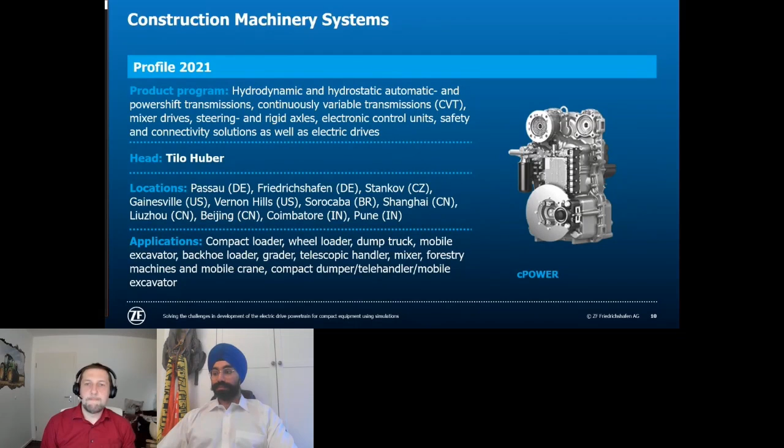The typical product can be seen on this slide. Here we see the fully automated power shift transmission, which is somehow a standard product for many construction machines, especially wheel loaders, across a wide range of operation weight. It's somehow the basic technology that we offer. Here on the right-hand side, you can see C-Power. This is somehow the technological lead before electrification—a continuously variable transmission with mechanic hydrostatic power split.

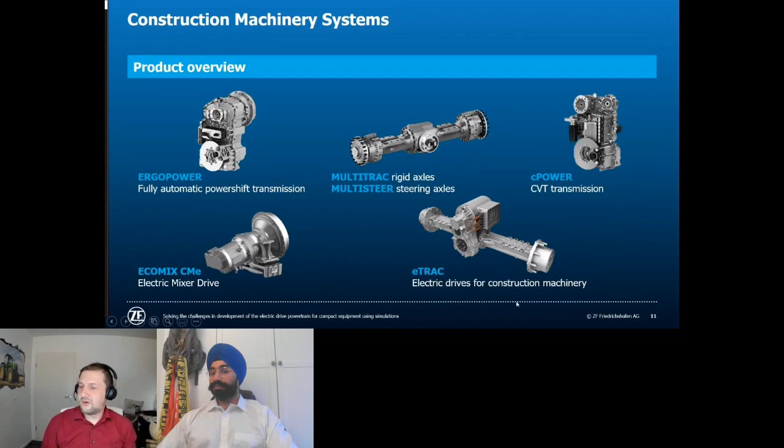The overview would not be complete without mentioning where the electrification of drivetrains had its beginning. In material handling, we have been offering electric drives and components for many years. ZF is a full-liner in material handling technology. We have drives for lifting carts operated manually, up to equipment for use in automated warehouses, for example. We have electric drives in our portfolio, electric steering systems, control units, transmissions, axles, as well as safety and connectivity solutions.

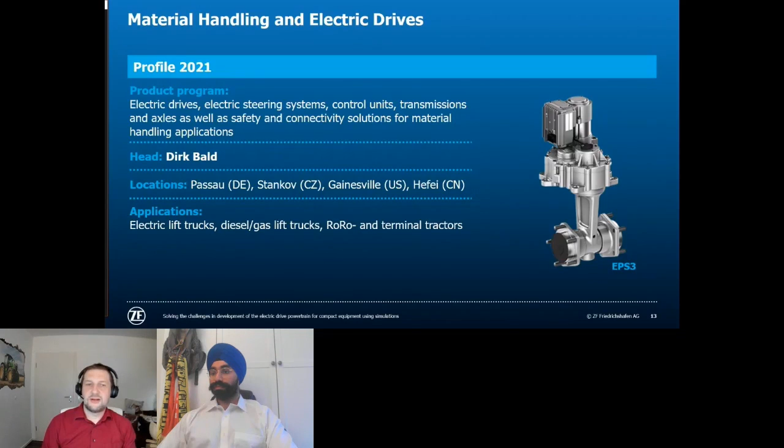This example shows a steering system for a front-wheel driven, three-wheel counterbalance lift truck. Here you can have a look at some parts of the material handling portfolio.

Material handling is the point where the partnering of the ZF Group and ZAPI had its origin. We are electrifying the mobility market together in this market segment for many years. We have a cooperation in development of the product, and ZAPI is the system supplier of this product.

I think this was a short and quick overview. And now let's dive deeper into our main topic, the development of the 48-volt central drive system.

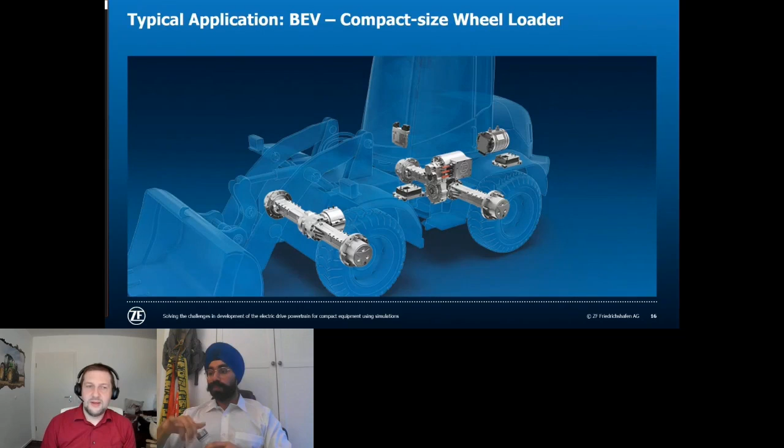But it also has a really huge mechanical kinematic to operate the implement, the big shovel. This is operated by a hydraulic cylinder that also has to be operated simultaneously with the drive by a skilled operator. So if you see this product, you see it's a really complex machine.

And for this reason, it was decided to use a systems engineering method to carry out the development tasks.

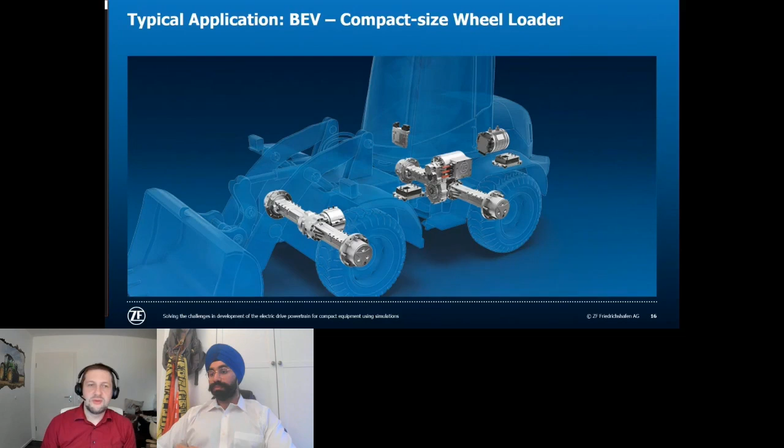We analyzed the starting situation. The main tasks, you can also call it the enterprise strategy for ZF in the construction machinery market, was electrification of a compact size wheel loader. Then, as important as this specific application, is building up a platform strategy for electrification of other construction machines up to 80 kilowatts power in the first step and beyond in the second step.

We analyzed the business needs for the project and got additional project targets. It's necessary to be first to market, or among first to market, because the electrified construction machinery market is developing really fast and growing. So we want to be part of this and be leading with technology. As the second point, staying among technological leadership, we had this position with the power split transmission, also with the CVT transmission, and we want to keep it. So we have a first-time-right approach for the electrification.

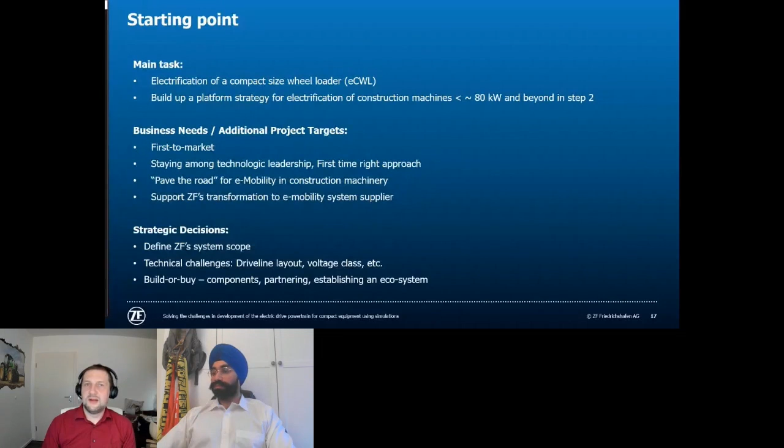And of course, it's challenging to decide whether to build or buy the parts, where to spend the invest, where are the components that are differentiating, where is it best to get a good partner to have the best solution at the end. And it's somehow establishing an ecosystem for developing electrified construction machinery.

For that reason, we did some context analysis of the system context of a battery electric compact wheel loader. If this picture looks familiar to you, it's a screenshot from a system model in the modeling tool Cameo. We did an analysis of the subsystems that this wheel loader consists of. Let's go through them quickly.

There is, of course, a need for a battery system, for a power supply for the battery electric wheel loader. Then we need a cooling and heating system—cooling and heating of the driver's cabin, also for the battery system and for the motors, e-drive motor and power take-off motor, and also for the inverters.

Then we need 12 and/or 24 volt power supply for the parts that are used from conventional machines, such as the HMI parts or, for example, lighting of such a vehicle. Then, as you have seen in the picture of the wheel loader, the hydraulic system is a really big part of such a wheel loader.

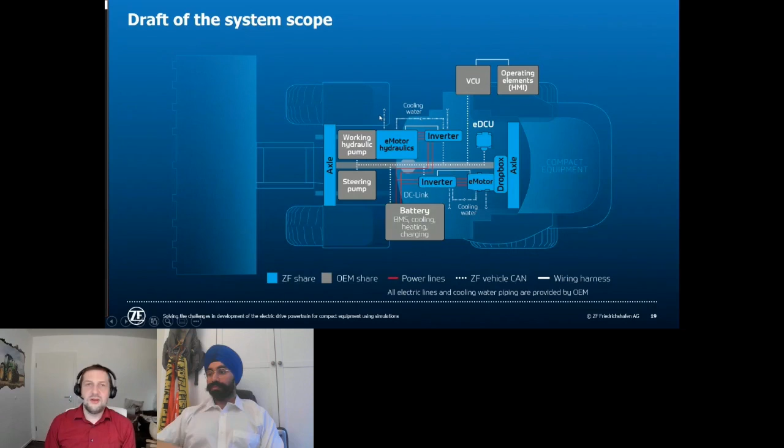And there are the components working hydraulic pump and steering pump, where we also said this is excluded from our scope. The reason for this is that we see the OEMs want to produce battery electric vehicles and diesel-powered vehicles in parallel. So it's better not to have much variance in their products, in the components that can be the same in both variants.

We come to this in the next slide, where we show what requirements we got from the stakeholder analysis that we did for designing the product. We, of course, used ZF's experience in developing construction machinery. We know the use cases. We have measurements of duty cycles, of course, for the well-known Y-cycle truck loading. My colleague Rajvinder will show this a bit deeper in his part. Then stockpile and transportation cycles are also known use cases for construction machines.

Then we did, of course, a market research and got the information and requirements that driving performance of a battery electric construction machine has at least to be at the same level as a conventional machine with a combustion engine. There are no lower expectations because a machine is electrified. That is not tolerable because those are working machines and they have to fulfill their duty.

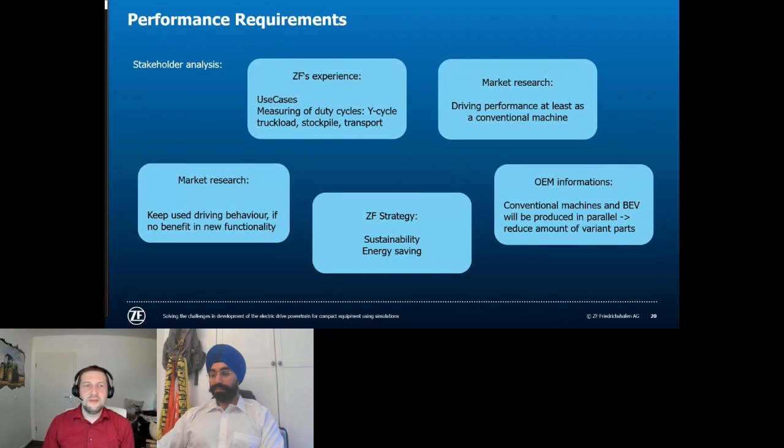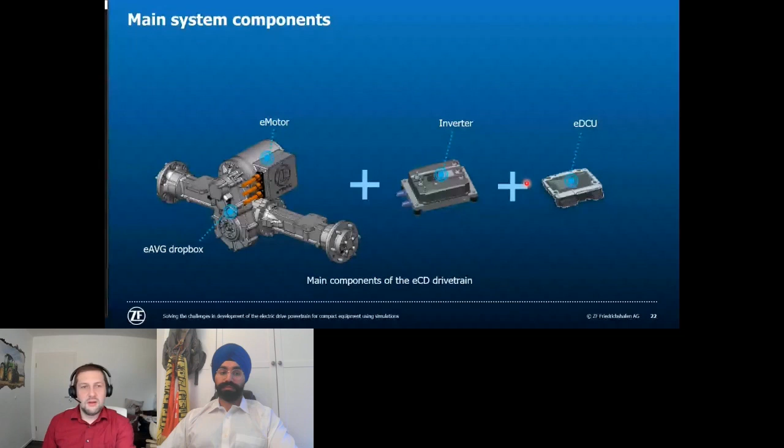So let's go one step deeper with the electric drive system. Here you can see that our transmission, this one-stage drive, is designed in one size that fits for all electric central drives, for all the e-motors, beginning from 20 kilowatt continuous power up to 80 kilowatt maximum power that we have designed for use in the compact construction equipment.

The same electric motor can be scaled in the nominal voltage in the range from 48 volt up to 650 volt. This can be done by adjusting the windings inside the motor, and also adjusting the stacks of metal sheet that are inside there, but without changing the diameter of the electric motor.

So this drive system fits to the machine platforms that the OEMs, that our customers have now, and they can change easily up to the electrified versions. The electric motor only changes in the length, and this is the less critical dimension where we can have installation space for the system.

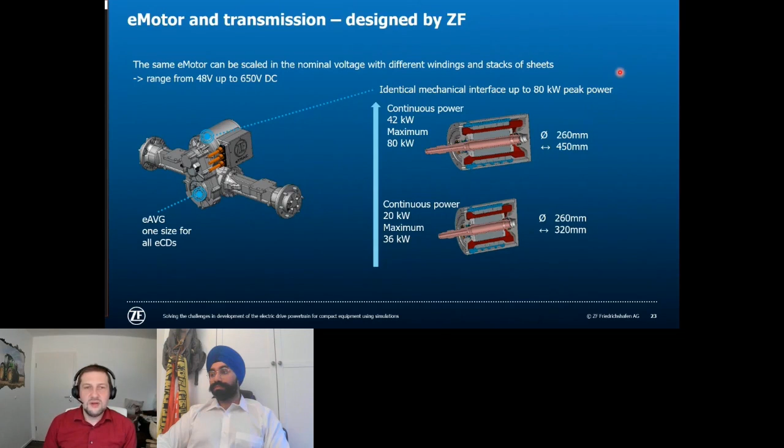And one additional advantage of this product is the change of operation mode. The same inverter can be used for powering the EPTO drive and also the drive motor. Both motors can be connected each to the same inverter.

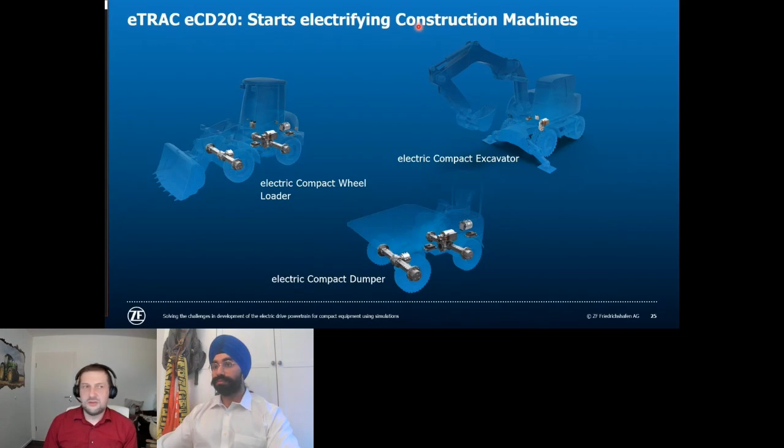With this overview, I want to end my presentation, and Rajvinder can take over. Yep.

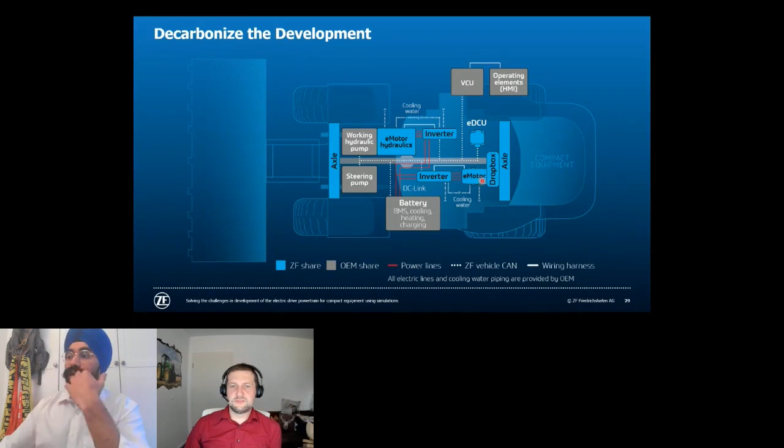As Werner explained, following the power lines, the battery is connected to the inverter for the electric motor that operates the power takeoff, or PTO. At the same time, there are battery lines that connect to the inverter, which is then connected to the traction motor. The traction motor is connected to the drop box, which is then connected to the axle, which drives the wheels.

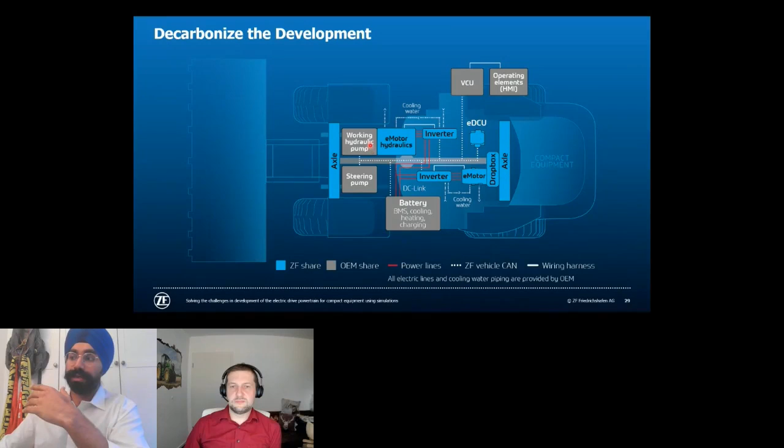The EDCU, or electric drive control unit, is responsible not only for the traction system—that is, the inverter, e-motor, drop box, axle system—but at the same time it also takes care of the electric motor hydraulics.

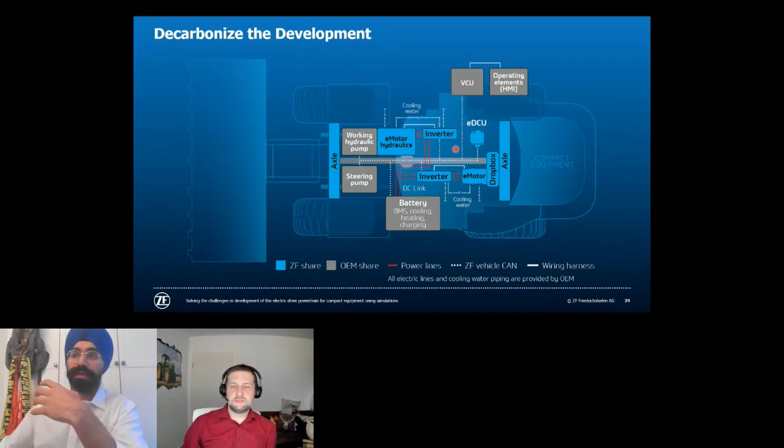The systems not directly addressed by ZF, such as the battery system, the VCU, and other auxiliary systems, although not directly addressed by ZF, we at ZF think in integrated development. So for us it is important to have a larger system overview than to just focus on our part and get done with it. That is why we focus on systems rather than subsystems or simply components.

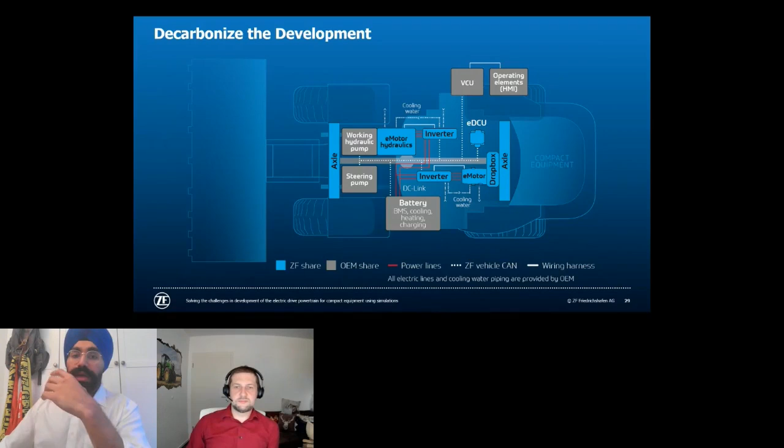Summarizing the challenges that Werner explained in his part of the presentation, we have these four main challenges in our crosshairs. We need the same performance, at least as conventional wheel loaders or conventional drives. We need to make sure that the architecture or the entire system we are developing is scalable, so it could be adapted to different voltage sizes, different motor sizes, and different gear ratios.

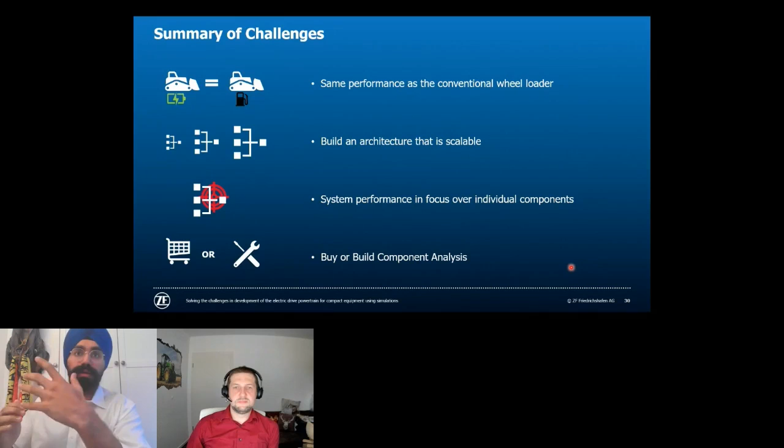In addition, as I said, it is important for us to have an optimized system and not just focus on the components. That means we would not like to be penny wise and pound foolish, but would like to focus on the entire system.

And finally, the buy or build component analysis. That is, does it make sense for the components that are already available—for example, the systems that SAPI Group provides—to see how those systems suit best with our system, and how we can use that so we can reach the market as soon as possible.

In addition, we also need to understand that when we talk about the same performance as conventional drives, it is not just about power, torque, or the load the vehicle can take. It is also about considering the work duration that a conventional vehicle offers. That means that if the conventional vehicle's work hours were 8 hours with a 16-hour rest between two shifts, the electric drive needs to provide this particular performance as well.

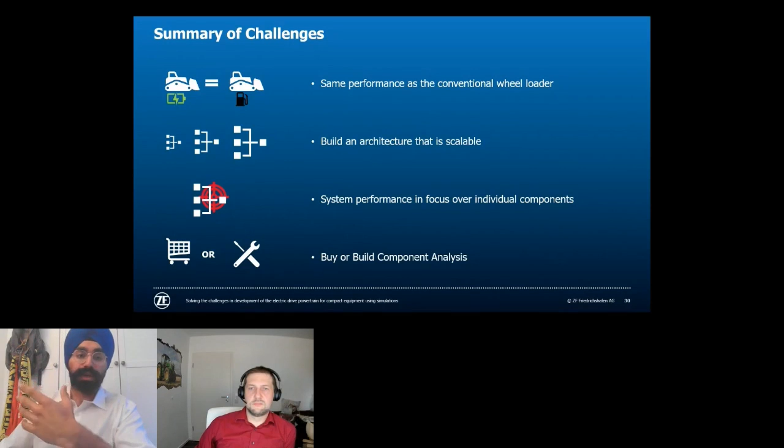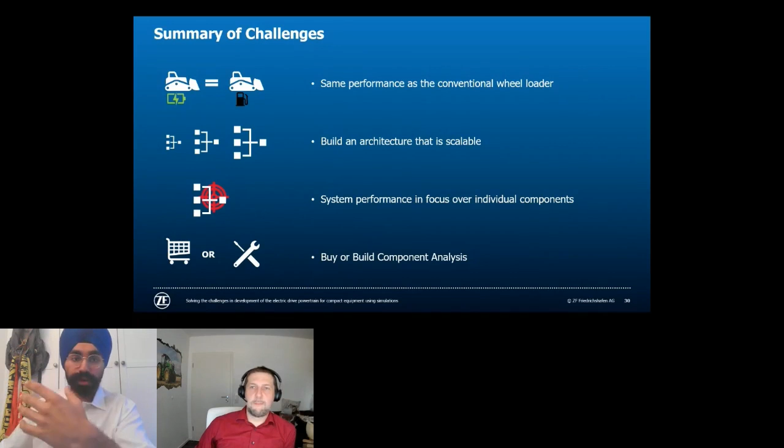Additionally, when we talk about these challenges, as Werner mentioned, it is important to make sure we do it quickly and accurately the first time. Now, we did this accurately, we did it quickly, but there are always lessons to be learned.

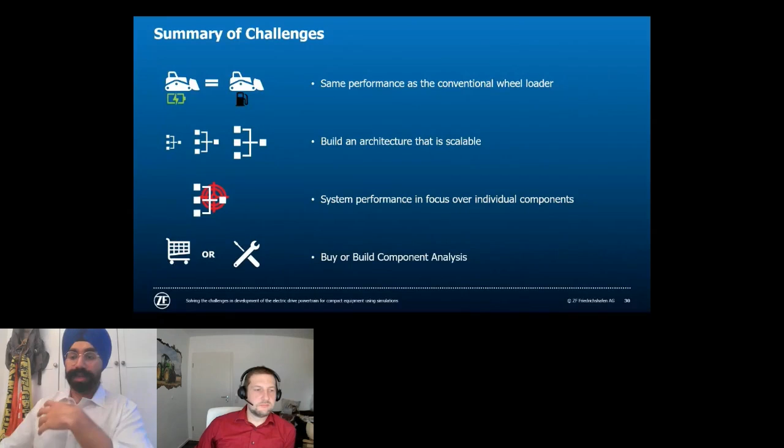This entire simulation process, which I am about to explain, has been divided into three parts. The first part focuses only on the past, or what we did. Then we talk about the present, what we are doing and what we learned from the past, and how this would not only support these compact equipments but also take forward the entire industry, improving all other sectors that ZF works in. And also the future, where we think about the direction needed to reach this sustainable, reduced energy or zero emission target.

So let's jump into the past approach. This is a very rough and small summarization of what we did in the past. There are basically three parts that we focused on. The first is the definition—just thinking about what our target is. Now, the target is, as I explained, these challenges.

Let us take one target, for example, the same performance as the conventional drive, or maybe focusing on scalability, something like that. So that is the first part of the approach that we used - properly, concretely defining what we wanted to achieve.

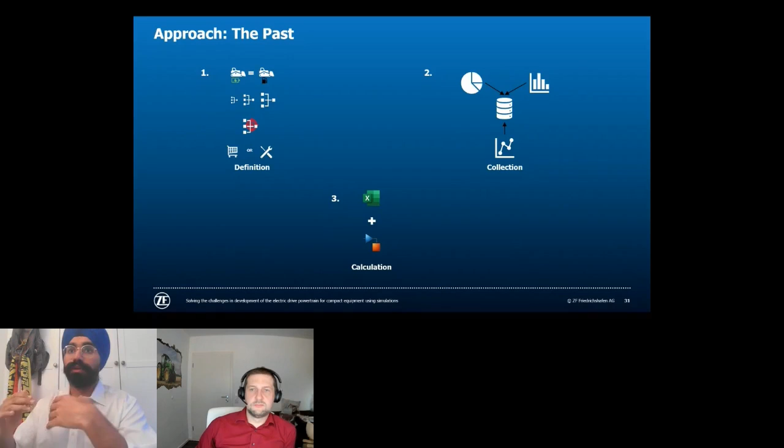The second step in this approach was the collection. The SAPI group, during the initial development phase and throughout thereafter, helped us with developing our system so we don't have to reinvent the wheel. That was really helpful, like using inverters from InMotion, and we got the data from them. They were constantly in exchange with us, and we were able to send our results, take their knowledge, and integrate the system as quickly as possible.

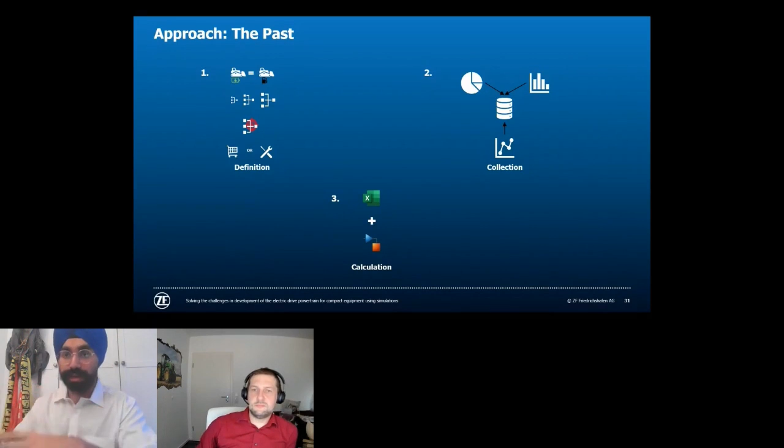Following the collection phase, wherein we use our past learnings and collect current data, while also collecting data from our partners, we get into the final phase, the calculation phase, where we think about how we can simulate it, if not extremely sophisticated, but at the same time reach a very accurate and plausible result. So that was the third part.

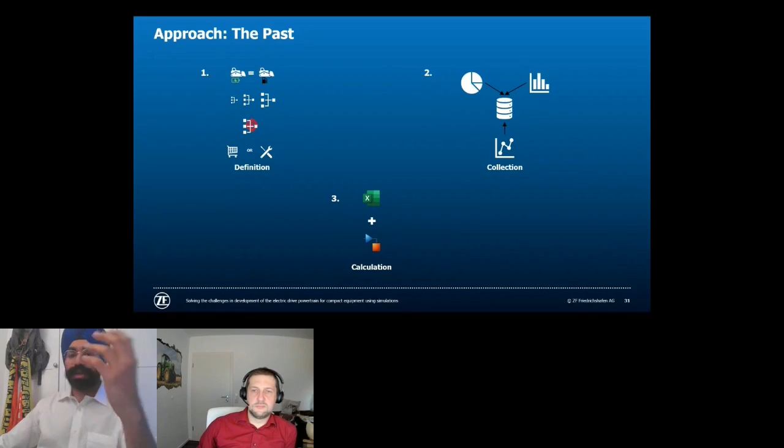These three steps, I'll explain using three or four basic examples - so how we went about it.

The first part is the thermal behavior, or when we were thinking about the thermal performance of a motor. This is basically a plot of the temperature profile across the length of the motor, with temperature on the y-axis. The target was to understand what temperature is reached at each cross section of the motor.

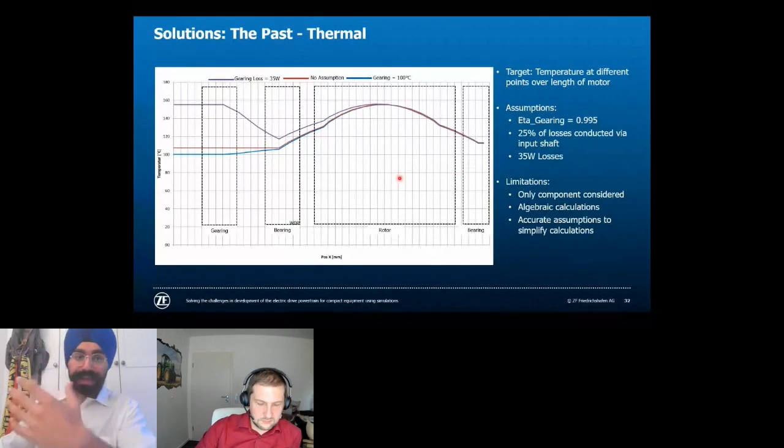The catch here was that since we are developing this equipment for the first time, in an initial development phase, you need to reach certain assumptions and take educated guesses so that you reach your result with the greatest amount of accuracy, while also making sure those results are verifiable.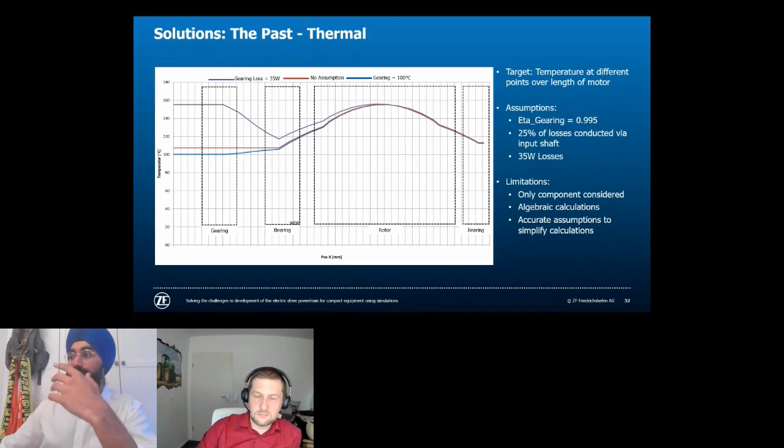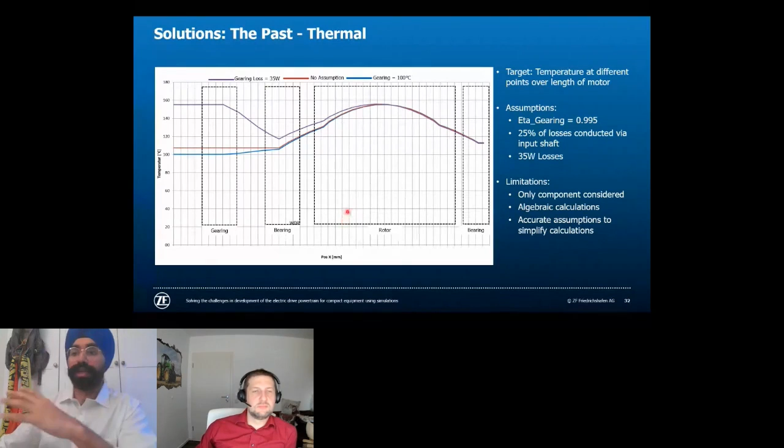As a result, we took some assumptions here, as you can see, regarding the efficiency and the percentage of losses that can be conducted over the input shaft, overall loss, etc. The limitation here was that during that time we were focused more on optimizing the component and had more of a component purview rather than going directly or jumping into the system purview.

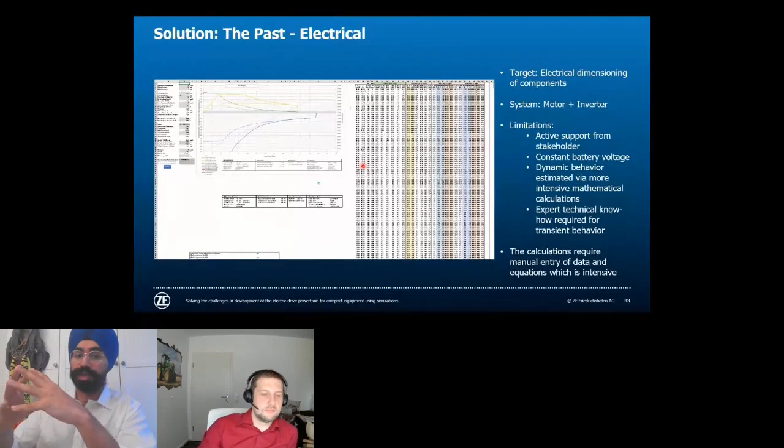Following this, if you look at the electrical analysis, we had more idea of the entire system - we had the system in our crosshairs, and we used this electrical analysis to decide the electrical dimensioning of different components. These simulations were basically made for different load cycles.

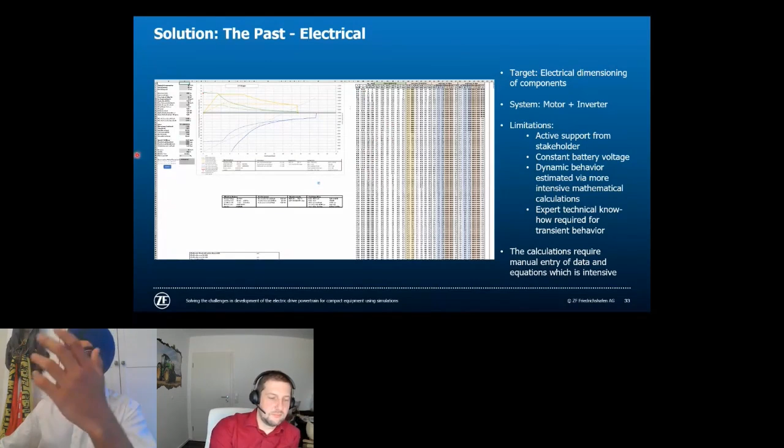As Werner might have shown, this diagram might be familiar from Werner's slides, for different load cycles across time. At the same time, we looked at what sizing of each component we need.

Additionally, if you look at the peak torque of the motor we were using, we wanted to understand if it can suffice our needs, so we took the motor and inverter into consideration - basically focusing on the immediate subsystem.

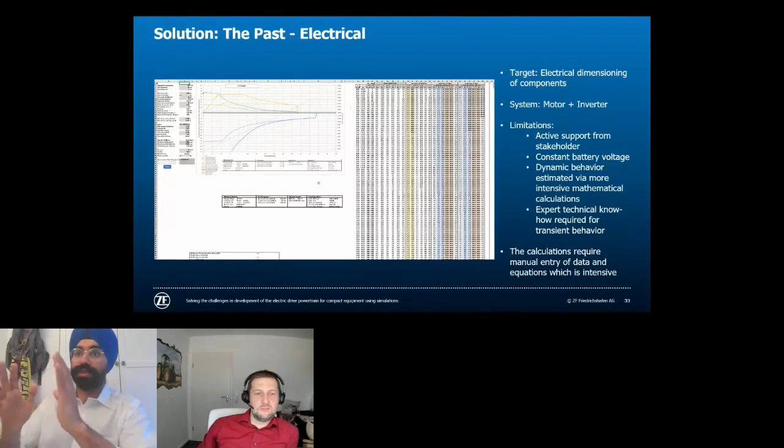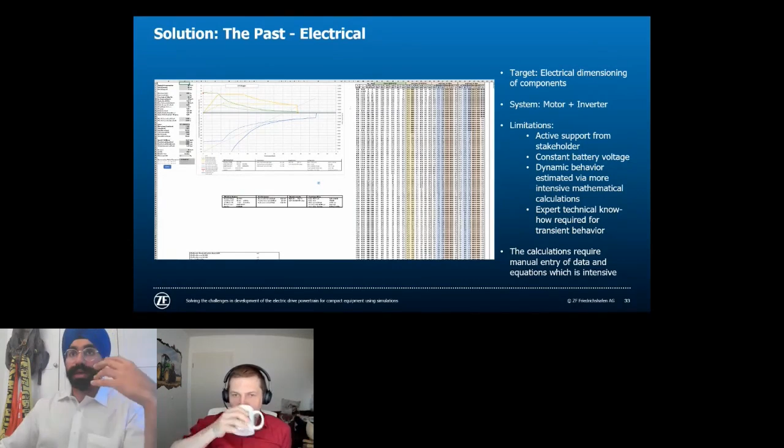Following this, the point I want to drive here, particularly with this calculation or this part of the simulation, is that focusing on subsystems and developing these concepts helped us realize what we actually need to focus on in the coming future and how we reach our target quicker. Although focusing on individual components and individual subsystems does lead to accurate results, it is more labor intensive.

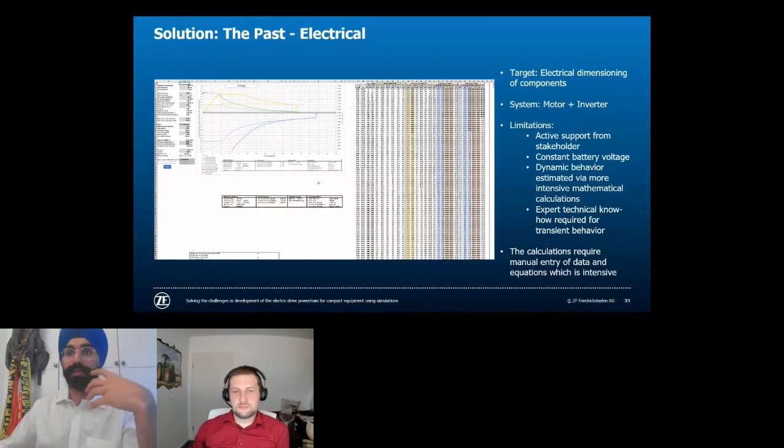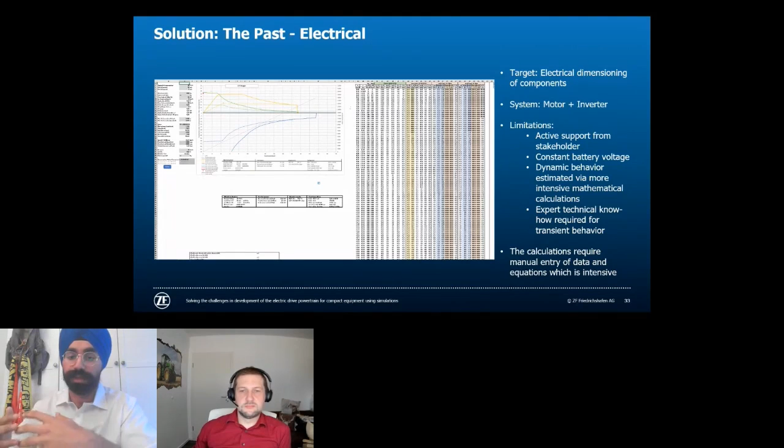It requires experts to be actively participating in the entire development process, and that basically slows down the entire development process as a whole. So our target is, like I said, to reach the market first, reach it accurately, and make sure that the product is perfect, but make sure that it comes in quick as well.

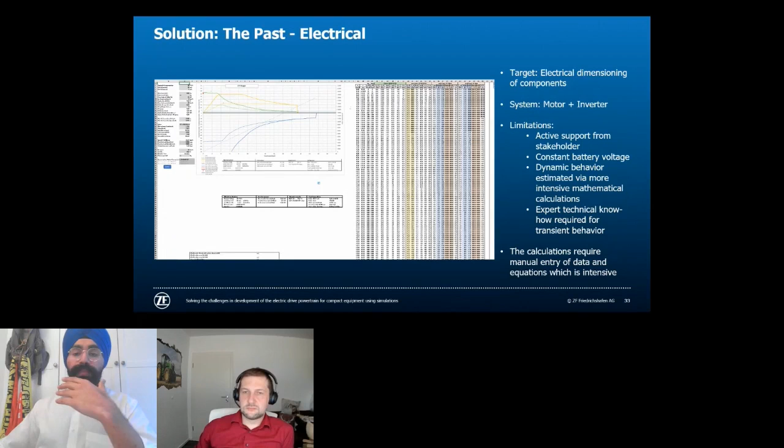Following the lessons that we learned from the past, we come to the present. In the past, as you could remember, we had three parts: one was definition, the other was collection, and the third was calculation. From that past, we learned that is not all that we can do. We need to do something more, and we need to reach a more comprehensive approach to solve our challenges.

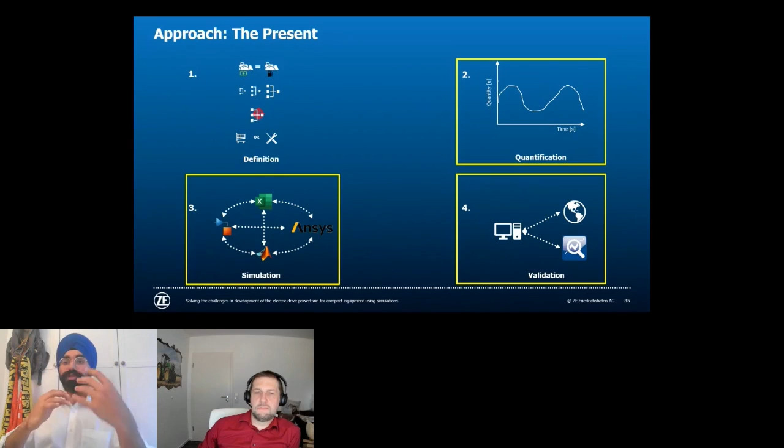So we came up with this 4-prong approach, or a 4-step approach, wherein we have the definition as always, wherein we define our target, following which we go into the quantification phase. That is, we focus on the system, try to quantify the targets in a power versus time, or a speed versus time, or a torque versus time profile over the lifespan or over a specific time duration of the vehicle.

So not just focusing on one component and how it would perform for a certain instant or operating point, but focusing on how the entire system or the entire vehicle would perform over a span of, let us say, a truckload cycle, the video of which I showed in the second or third slide. Or a stockpile cycle or a transport cycle, or what would happen when I keep running those cycles one after another, or a mixture of them, over a span of 5 years, 6 years.

What would be the performance of the vehicle? That was important for us to take into consideration, to extrapolate our vision and push the vehicle. What would happen if we push the vehicle to its breaking limits? So that comes in the quantification phase.

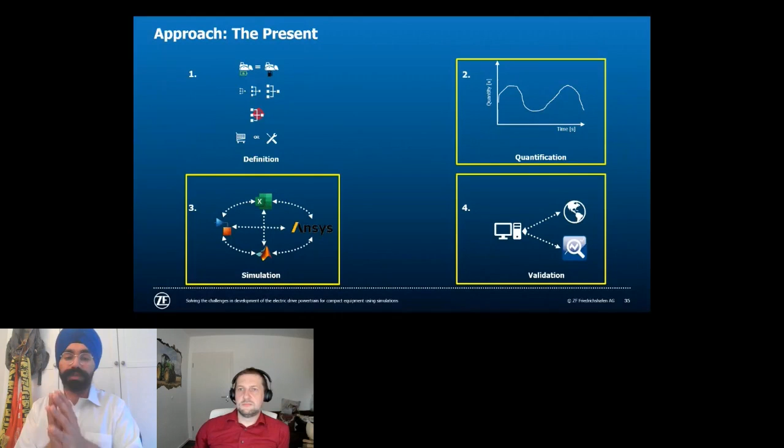The data, the calculations, or the understandings that we gather in the quantification phase, we use this data to run our simulations.

The simulations, as compared to what we did in the past, are more integrated. They are more top down, rather than just going from down to top. That is, we not only focus on individual components, but on the entire system, and we don't stick ourselves to just one software, but take a mixture of software, look at the interaction between all of them, and use that entire knowledge to try to optimize the entire system. So that is the target of the simulations.

And finally, following the simulations, we get into the validation. The validation here, for those of you aware of how things work, is not the same validation as what you might find in a traditional technical approach. In this, this validation is basically to optimize the simulation.

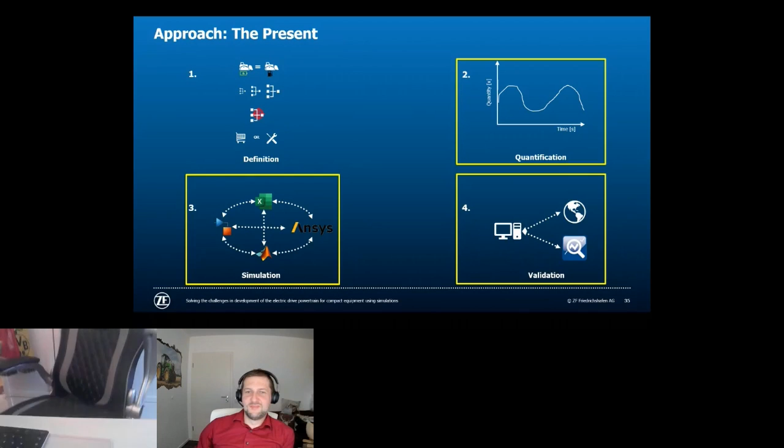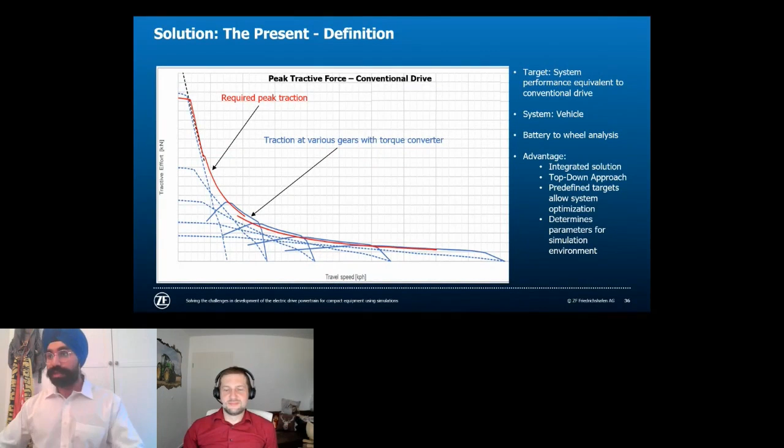Okay, so now getting on to the first part, that is the definition. So the definition, as you can see in this slide, our target was to reach the same performance as the conventional drive.

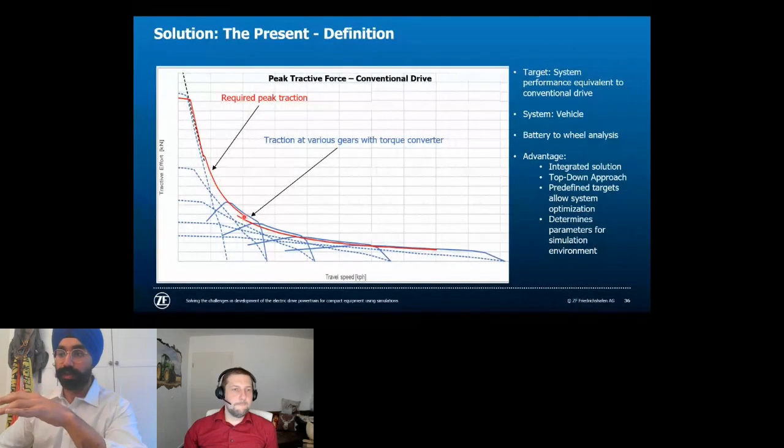So we have this conventional drive profile that we had from the initial drivetrains, or the initial equipment, that we had provided. You look at the peak performance or the peak traction that is required. What I would like to emphasize here is that the peak traction or peak performance of the vehicle is in focus, not just the motor or a particular subsystem.

Additionally, if you look at it, you see the performance or behavior over various gears with the conventional drive that we had used. So the advantage of this system is that we are focusing on a battery-to-wheel analysis, not just certain subsystems. We are focusing on an integrated solution, and the target of the entire approach is to optimize the system rather than just certain subsystems or components.

Once we use this in the definition phase, once we take the performance of the conventional vehicle and overlay the motor profiles, we see a region of overlap between the peak profile of the motor and the continuous profile of the motor. This overlap region basically helps us understand when to go into the shifting phase, that is, when a gear shift should happen.

Conversely, if I were to decide the point of gear shift, or the vehicle speed at which I would like to shift gears, I can see which motor profile would fit this particular range the best. This is the approach you take, and these are the knowledges you gain in the definition phase, which are then used further on in the quantification phase.

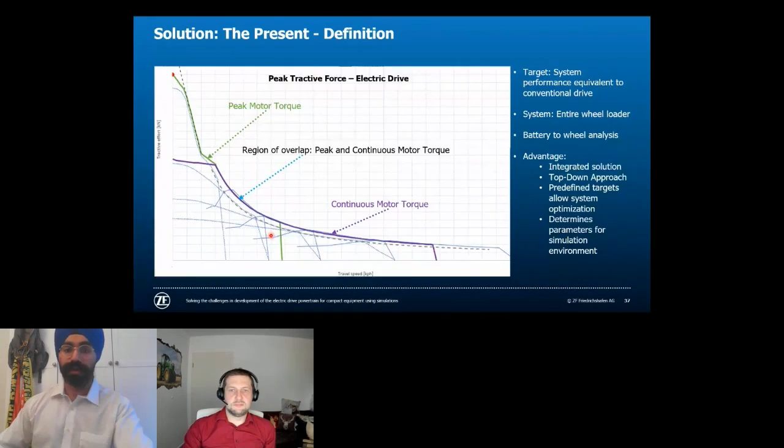As I explained, quantification is collecting data from the short Y cycle, or basically the performance or behavior of the vehicle in any of the cycles, the data which InMotion kindly provided us of their systems, then the knowledge that we had, the knowledge that was largely available.

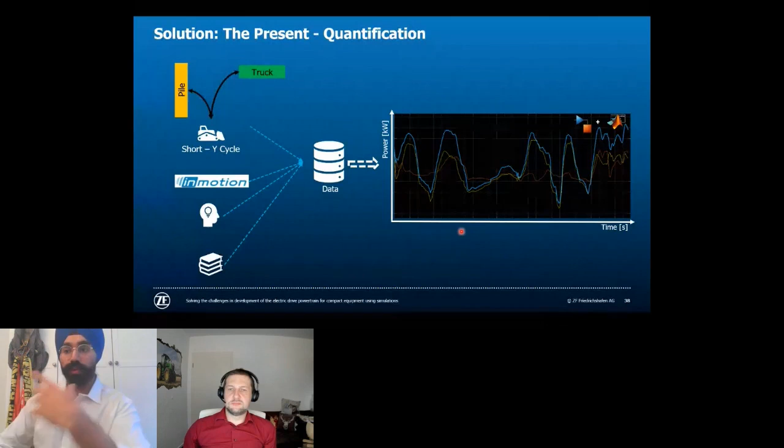You collect that data and use it to build a power or any sort of profile against time, which can be reiterated over and over again, and fed into a simulation environment. The advantage of doing this is the possibility to push your system to the limit, which in reality might not have been possible. If you were to focus just on a part of the system, it would result in a successful system on the component level, but might result in failures on the system level.

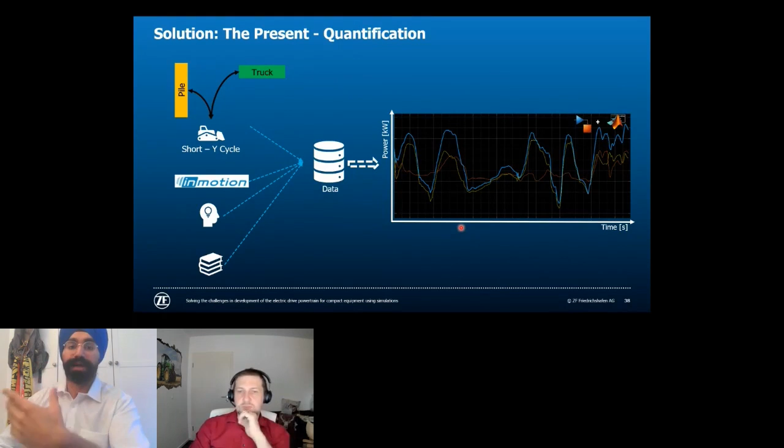So we are done with part one, the definition and the quantification. Now we go on to the main crux, that is the simulation. This is the main crux of the entire presentation, or my part of the presentation.

You have the system requirements decided during the definition phase, and additionally the data you collect during the quantification phase. These system requirements and performance requirements are gathered using Cameo, like what Werner showed, and additionally Code Beamer to manage requirements, and Excel, because it's apparently one of the most powerful tools. So you manage these system requirements.

You take these system requirements and work them out into a systematic power profile or any sort of profile over time, as I explained in the quantification phase. You feed those power profiles into a driver model. The entire simulation environment is built using multiple software, that is MATLAB Simulink, Dymola, and also integrates many FMUs, hence it has to be FMI adherent. These performance or power profiles are fed into a driver.

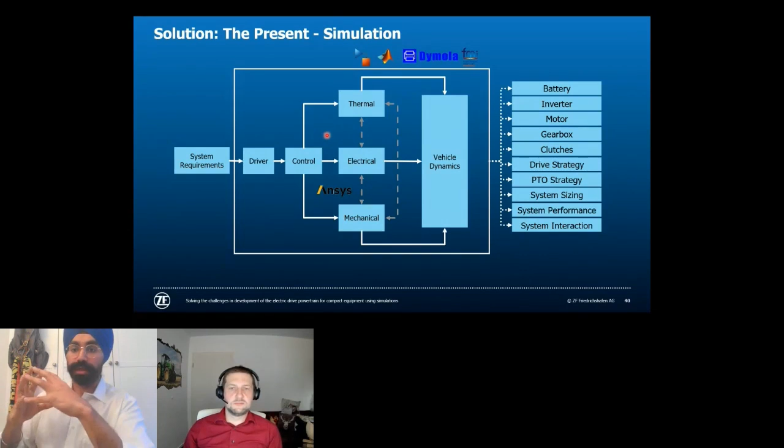The controller is not only giving commands to the thermal system - the thermal, electrical, and mechanical systems communicate with each other as well. The point I'm driving at is that, again, we have the system in our main crosshairs rather than just one single component. So when we talk about the thermal system, it's basically the entire thermal system of the motor as well as the gearbox and the battery. If we talk about the electrical system, that's the battery, the inverter, and the motor.

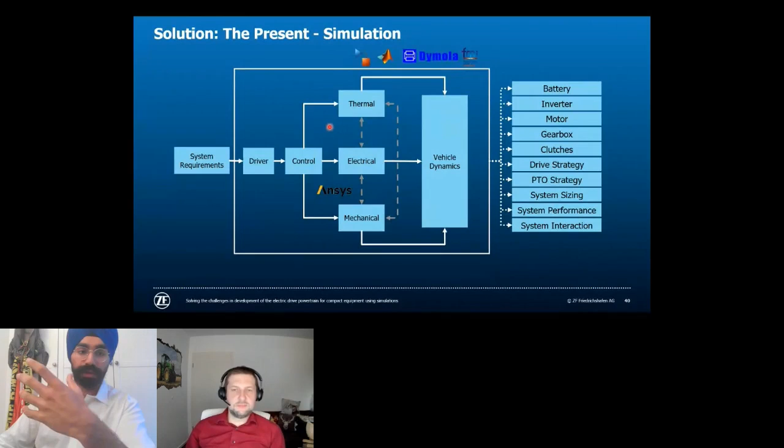The data for these models is obviously obtained from other stakeholders who provide these systems, and also from the OEM, depending on their share of the product, or their share of the project.

Additionally, if you look at the mechanical part of it, it basically tells you how the vehicle would perform as a whole. What we use is ANSYS software or individual component simulations to populate the parameter files for these three systems: mechanical, electrical, and thermal.

The advantage of doing that is you have a very accurate system already modeled inside your simulation environment, but it gives you the freedom of not having to use complicated or transient simulations all the time to parameterize your environment. Instead you can use a quasi-static simulation approach to simulate the entire vehicle, which is quicker.

Following the three systems, you enter into the vehicle dynamics. From the vehicle dynamics, you have an output or system analysis interface, wherein the analysis of the battery, the inverter, the motor, gearbox, and also the system sizing and performance can all be done, looking at this simulation interface that I've shown.

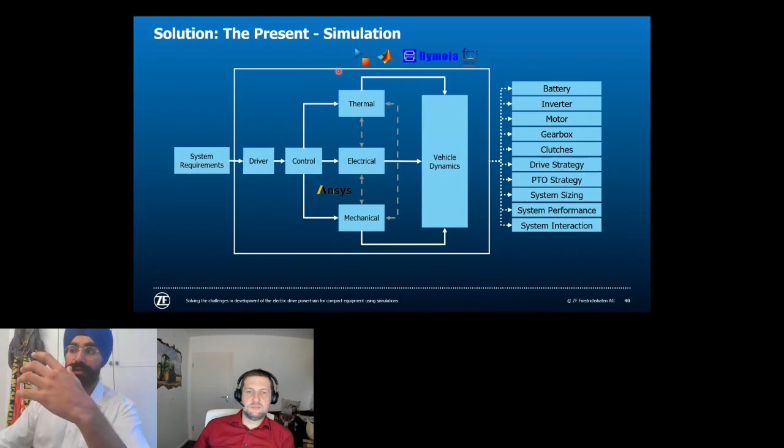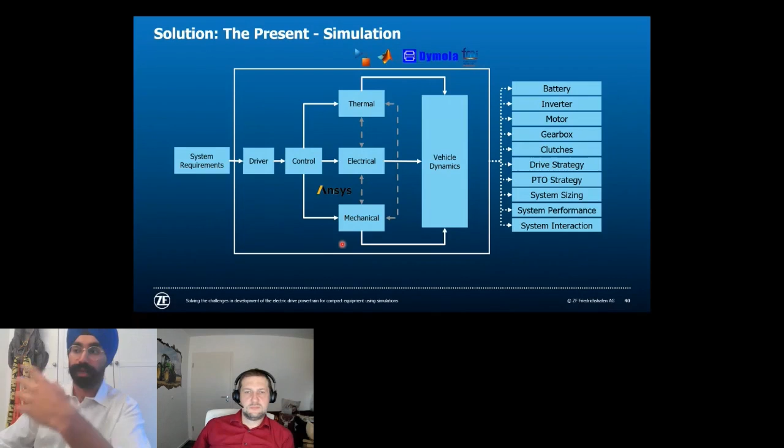I can take care of scalability, or basically buy-or-build analysis, by populating these three systems, wherein I populate the component files from the data I get from the stakeholders and also from the data we decide to enter into these subsystems. I have system performance in my crosshairs, and at the same time I can manage these system requirements as I please.

Additionally, if I talk about scalability, this particular simulation interface is infinitely scalable. I can scale it to any other platform, and I can use this particular approach for simulating any other vehicle as well.

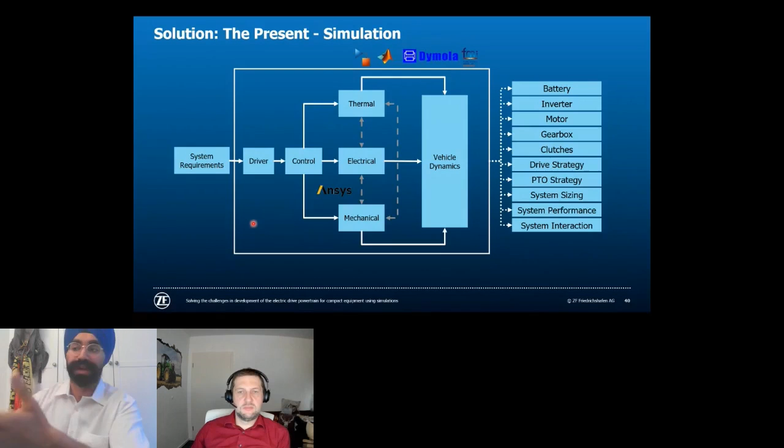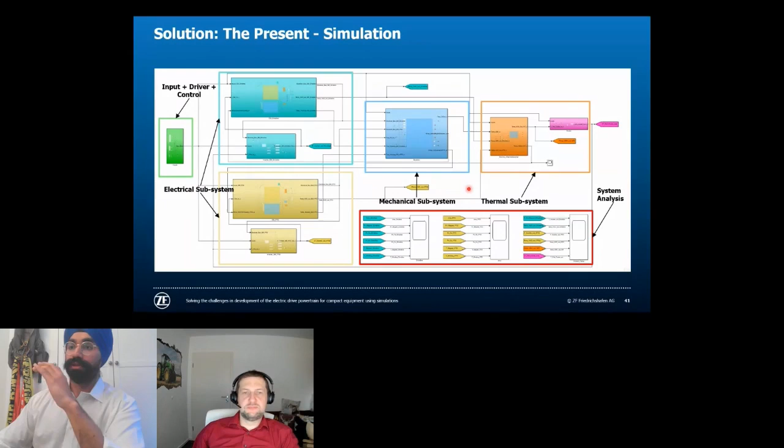You might notice I haven't shown over here the vehicle subsystem, because that's something OEMs generally like to keep under wraps, and as a result we are not privy to show that right now. But overall, from our side we show an additional vehicle subsystem, which accesses all this information and then provides the basic system performance data we need to reach a very educated decision.

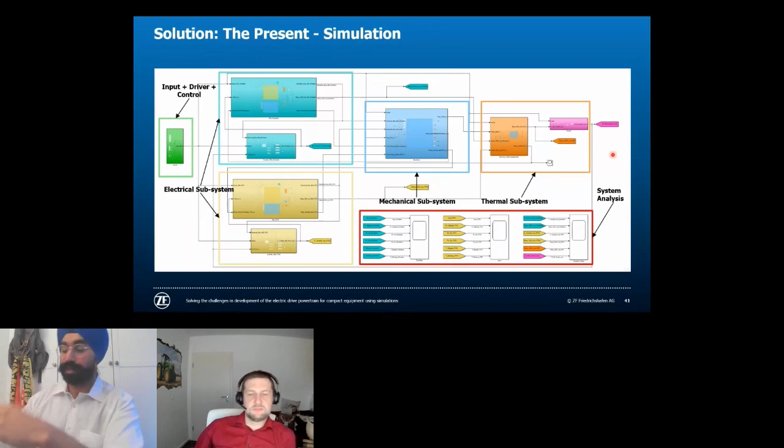Looking at certain results generated via this simulation, one of the challenges we had while designing the system is the cold start performance and its remediation. So what we thought about is simulating the entire system at 0 degrees Celsius, looking at electrical losses we have at 0 degrees Celsius.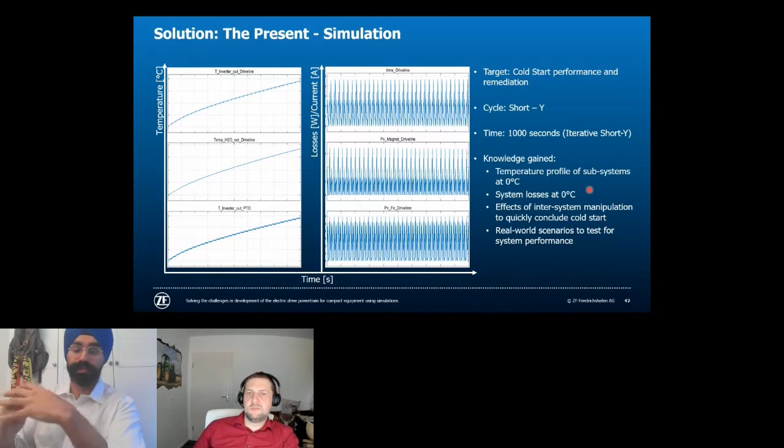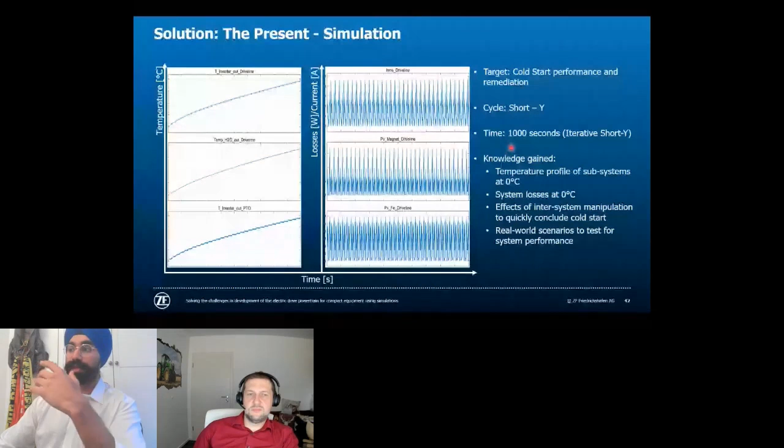The idea was to simulate real world scenarios as closely as possible, and at the same time try to find a method or trick, so to speak, so we can end this cold start phase as quickly as possible, bringing the entire system temperature to its desired temperature as fast as possible. In doing so, we run iteratively a short drive cycle for, let's say, 1,000 seconds as an example. The advantage of these simulations is that you can not only look at the derating strategy if we are critically pushing our system at 0 degrees Celsius, for example.

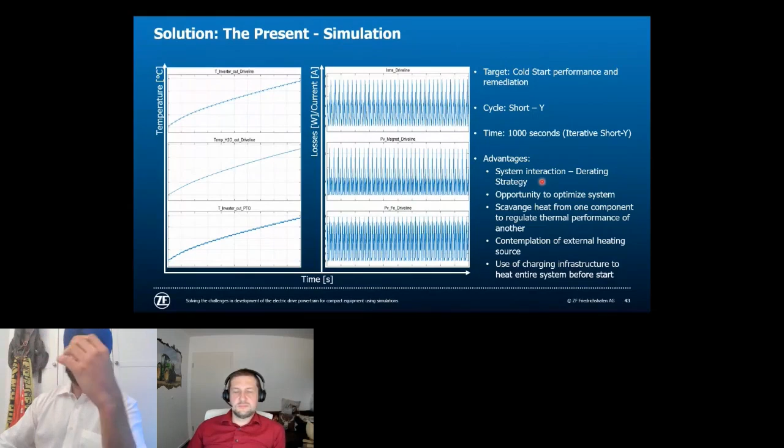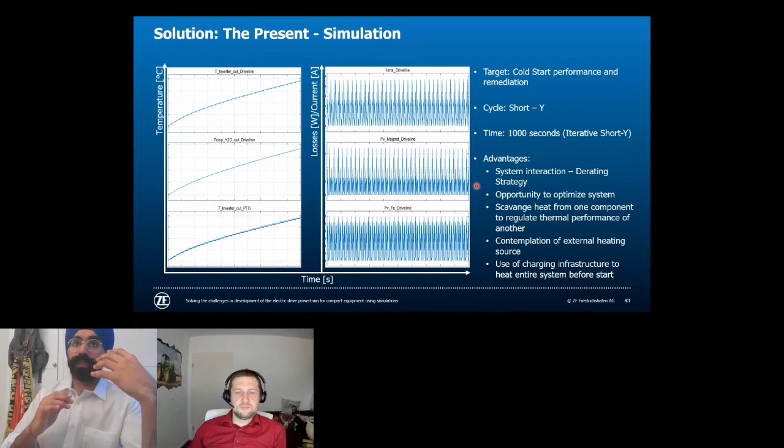We have the opportunity to optimize the entire system, because we not only have the currents and the losses in the motor, but also we focus on the temperatures at various points, for example, in the inverter or in the driveline. Additionally, we have the opportunity of scavenging heat from one part of the component and passing it to another part, so that we could use the heat generated in one part to heat up the other part, so it can reach its optimal working temperature.

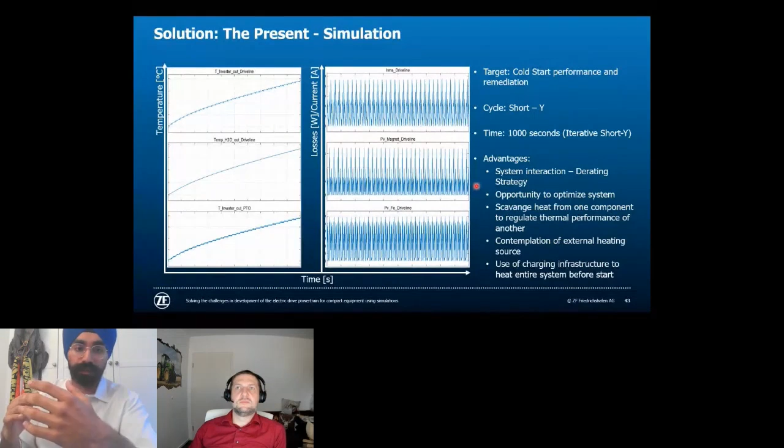Additionally, it gives us the idea of testing if using the charging phase, which happens at night, we can bring the entire system to a certain temperature before starting work. That is also an additional advantage we had while simulating these results.

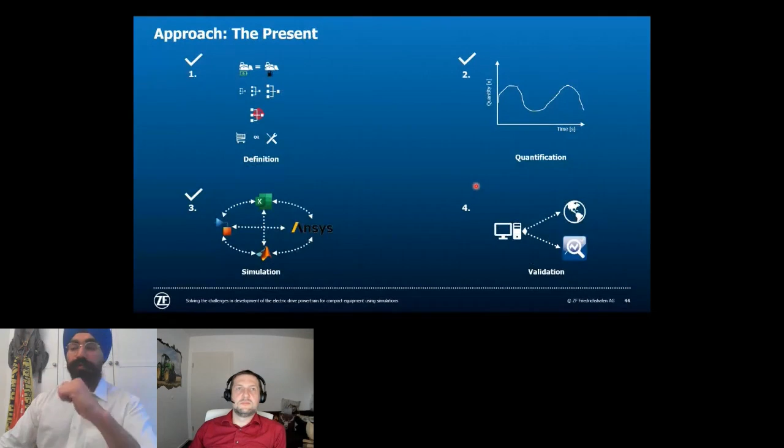So coming back to this overall overview, we are finished with the definition, the quantification, and the simulation as I've shown. Now let's get on to the validation.

Thinking about validation yet again, the idea is not to jump from simulation into manufacturing and then try to validate your product or see if it performs as you want. The idea of validation is basically, in the simulation environment, to use the outcome or results of the simulation and try to mimic them on the test bench or in the field.

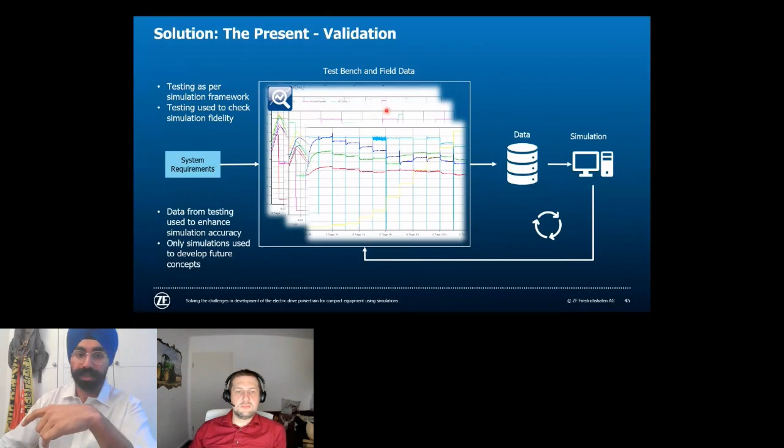The deviations that you have from this particular testing, you feed those deviations back into the simulation area and try to simulate them again. That is, you try to couple the simulation and the testing in such a way that at the end of the day, it can improve my simulation interface as a whole.

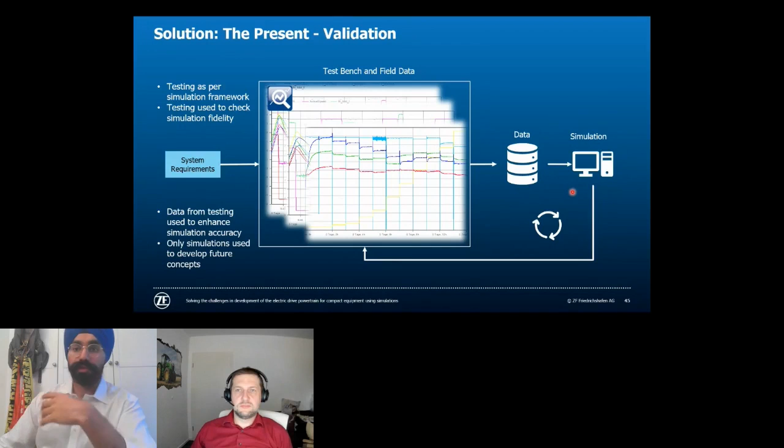The purpose of being so simulation-focused, or the idea that we at ZF have of trying to improve our simulations to such a larger extent, is something I would explain towards the end of the presentation. But it is always, in our opinion, easier to simulate something and check beforehand if there are any issues, than to manufacture it and end up wasting your resources.

So the present is complete. That is, we are finished with the definition, quantification, simulation, and validation.

Going over to the simulation ecosystem, let me just summarize it. How does it look? It is the start, then we get into definition, quantification, simulation, validation. The validation and simulation is iterative, and then you reach the target.

The data set, or the data required for each of these stages, is pretty self-explanatory. You need requirements, the data from stakeholders in the definition phase. In the quantification phase, you need data sets for the model, the power profiles, the dimensions, and the characteristic or performance maps.

In the simulation phase, you need to make sure that you choose the right software and standardize the code, as well as the interface.

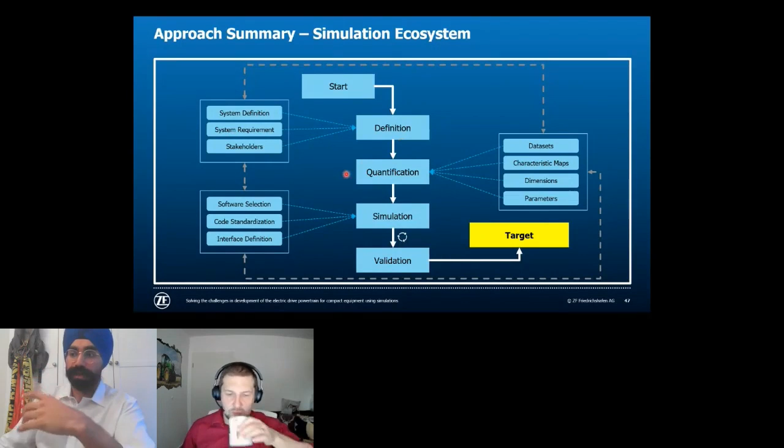But what we additionally need to focus on is that there has to be a unanimous or unified approach when choosing this data for each step and feeding that data. That is, the code should be standardized, meaning it should always have a standard nomenclature, a standard methodology of coding, and a standard interface that is reproducible, adaptable, and scalable.

When we talk about system definition and requirement, we need to make sure that the code developed is always in congruence with the system definition and requirement. At the same time, the data set and the characteristics map we have should be in congruence with the system requirement, and at the same time, with the coding and simulation interface.

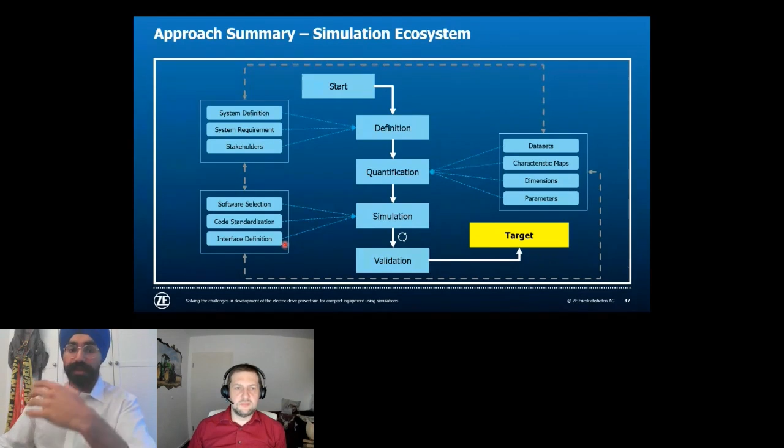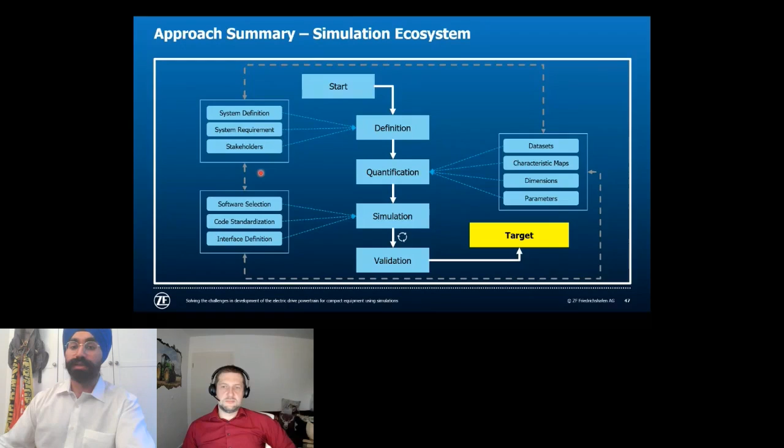The reason we think it is very crucial or critical to have such an integrated approach is that we see the simulation of the future to be the digital twin.

That means we think we need the opportunity to take the entire simulation and put it on a virtual cloud interface, so that not only the owner but also the participant can access this simulation, use it to optimize the entire simulation interface, and reduce or accelerate the entire development process.

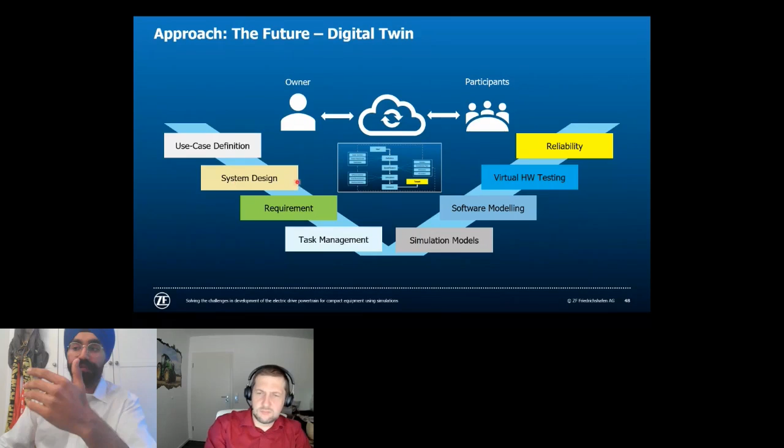That means that based on a use case definition, we reach reliability in the shortest time frame possible and with the least number of iterations, or the least number of times that we step back to a step before where we have reached. That means that if we have a use case definition, the system design and the requirements in the tasks should be so decided that everything on the right hand side of the V is plausible and reachable at the quickest pace possible. This is what we think is the future of simulations.